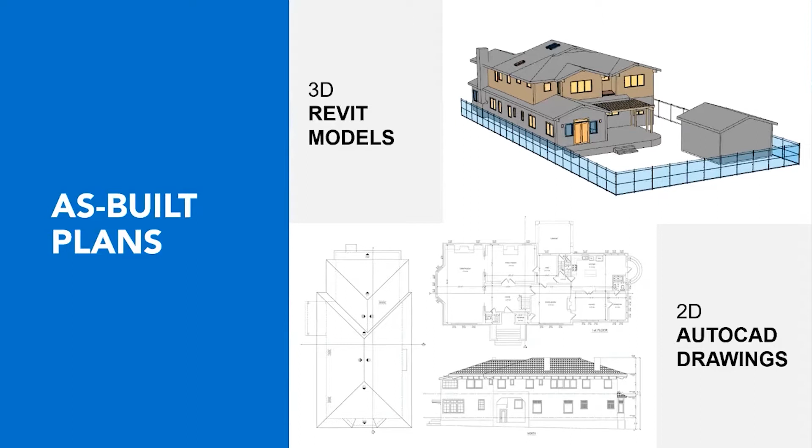All right, so now that we've defined somewhat what as-built plans are, we'll talk about when as-builts are actually needed. Pretty much whenever we're working with an existing building, we'll need as-builts before starting our new design. If the owner or client happens to already have as-built drawings, then we may need to just enter them into CAD, or reformat them if they're already in CAD, and confirm that the drawings are up to date. If errors or inconsistencies are found, at some point you may decide that a fresh set of as-builts is needed.

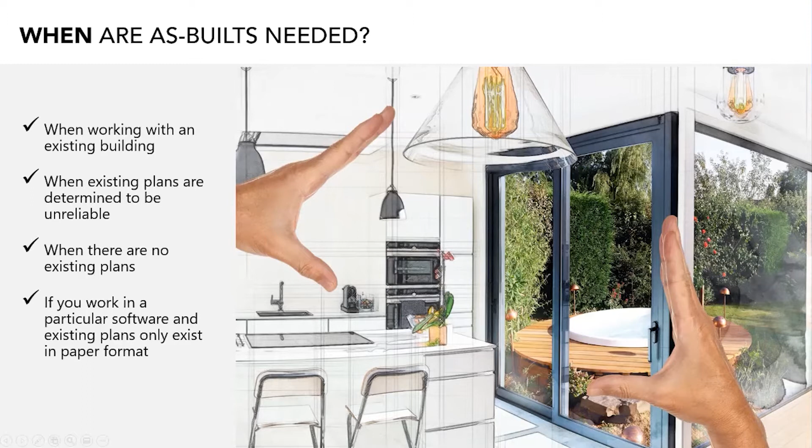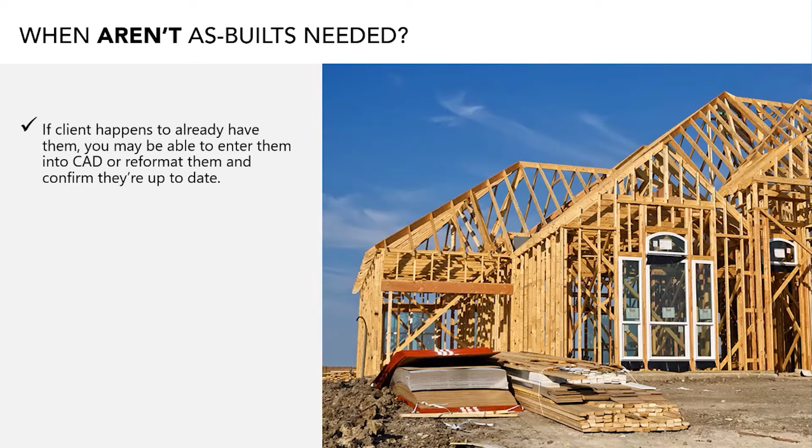Let's also talk about when as-builts are not needed. It's rare that clients already have current as-builts of their existing building, as we saw in the poll, but it does happen. So in that case, of course, you would not need more before starting your project. There are also simple cosmetic projects that don't require having accurate as-built plans. And of course, if a building is being built from scratch, under that last simple definition, you are not going to need as-builts because it's brand new construction and all you'll need are your construction documents.

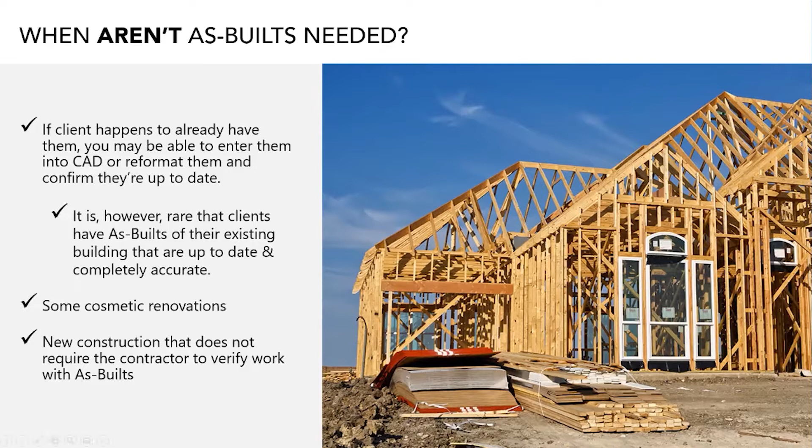Okay, so when's the best time to obtain as-built plans? In most cases, the as-built files are the very first step in the renovation, so that's probably the time to get them. Getting ahead of this step allows an architect to focus on their design and plan creation. There are also cases where you'll be submitting to historic review and they'll require as-builts before you start. And sometimes when you're working on a teardown project, some building departments will require you to submit as-builts of the buildings being demolished.

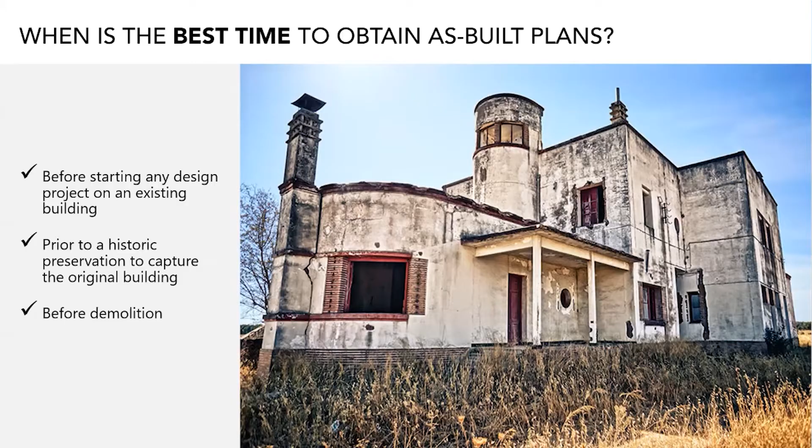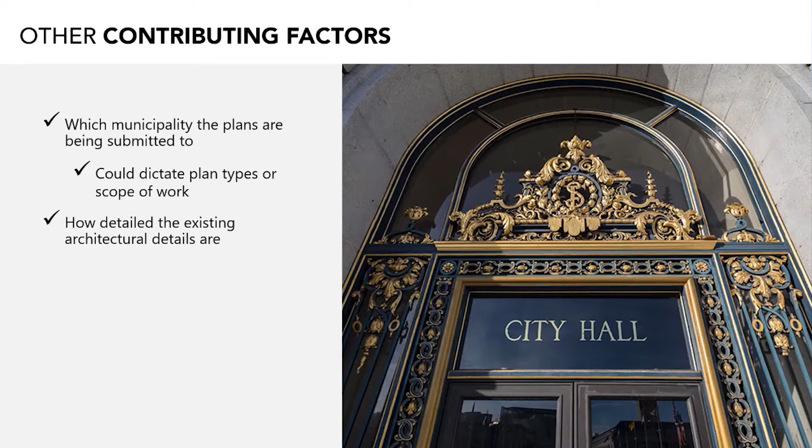So as I mentioned on the previous slide, different municipalities work differently and have different requirements. Whether they require as-builts for any reason, or the type or scope needed, may vary from city to city. If you plan to improve upon detailed architectural elements, such as ornamentation, you'll need to consider documenting it and where it fits in your timeline. And overall, the size and the scope of your project will determine when as-builts are needed, and, as we'll discuss in the next section, to what degree and scope the as-builts are required.

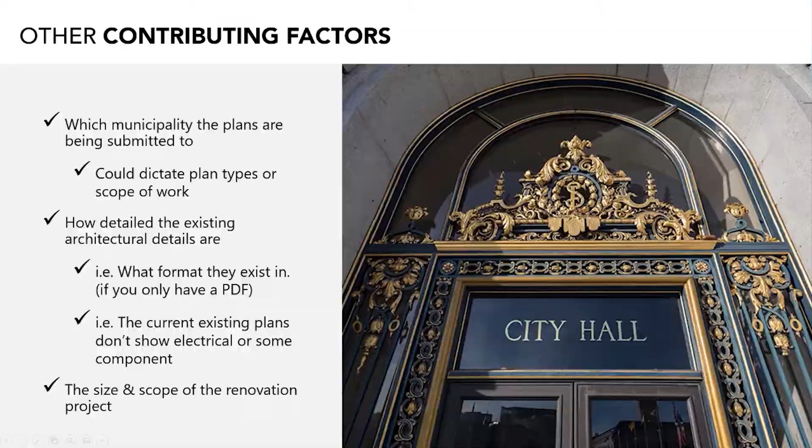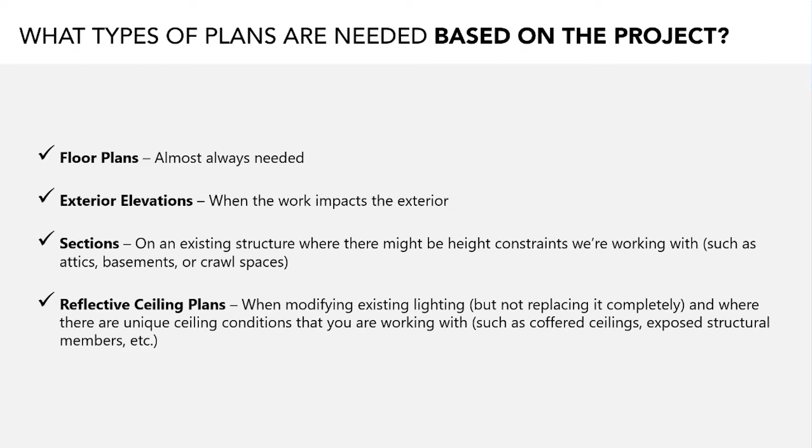So you've discovered you need as-builts. How far, or in how much detail, do you need that information to go? Above are a few examples of plan types and when they're needed in your as-built plan set. You almost always will need floor plans. If your work is impacting the exterior, then you may need exterior elevations. If you're working on an existing structure where there are height constraints or funky ceilings, soffits or anything like that, you may want to look at getting a reflected ceiling plan, and for knowing that vertical relationship, sections can be beneficial. But ultimately, it's up to you as the architect to decide the scope for your as-built plans, or consult with your engineer on what's needed.

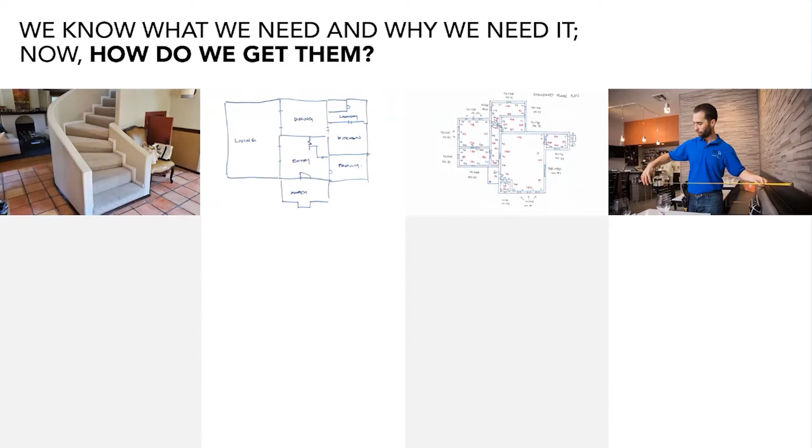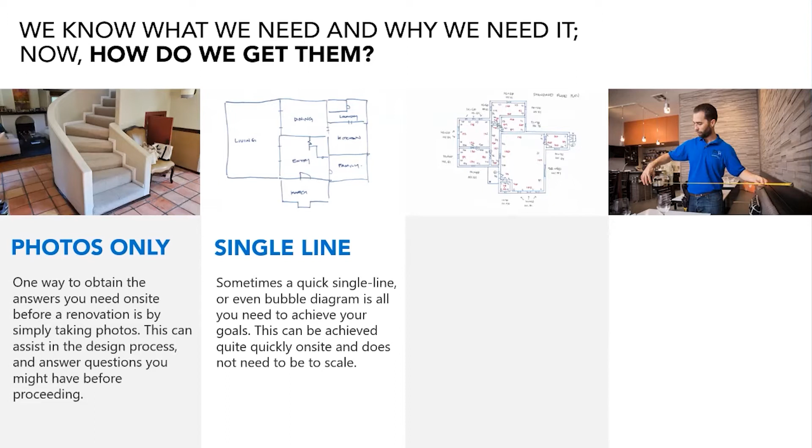So let's get into some of the different ways to gather different degrees of on-site information. We'll talk about simpler stuff first, and then we'll launch into getting a full-blown as-built set. One way to get on-site information is photos only. To obtain the answers you need on site before renovation, just take some photos. They can assist in the design process and answer questions you might have. Sometimes a quick single line or even bubble diagram is all you need to achieve your goals. This can be achieved quite quickly on site and does not need to be to scale. Sketching can be very helpful in supporting your design.

In the case of interior elevations or perspectives, this can be done roughly and not even require measurement most of the time. If the drawings need to be to scale, and if you're going to use them to create your construction documents, then you'll need to go to a higher level of accuracy and go out and measure the existing conditions.

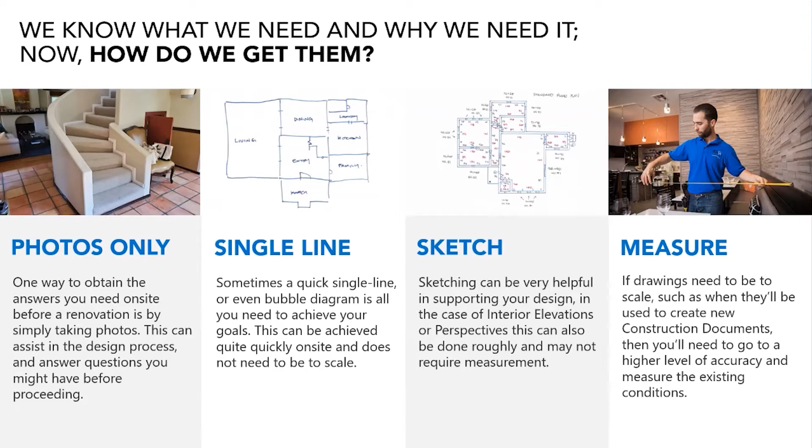Most remodel projects require a more detailed scope for as-builts. That's the simple truth there. It'll give you the head start that you need in creating your design and submittal and construction documents.

So, to sum up the first portion of this presentation, as-built plans, simply defined, are a set of plans of any structure as it exists at that moment. They're often used for renovation of some type. Getting as-built drawings in the format in which you work is important, such as a particular software, or at least a software that you can easily convert to yours.

The scope of the as-built plans and the detail of each scope item will vary with the needs of your project. Now that we've defined what they are, let's talk about how to gather that information on site. And we're going to start with some traditional surveying methods. First is something near and dear to my heart, sketching.

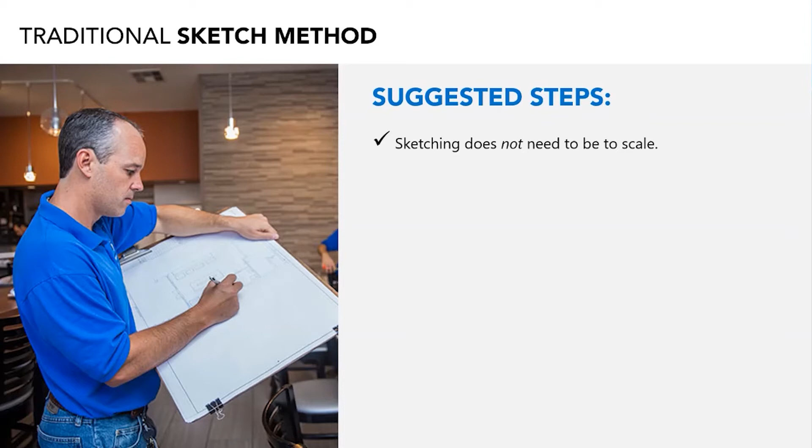So here's how you might sketch. First of all, remember that your sketch does not need to be to scale. All you need to do is make sure that there's room to write in all the measurements you need and that it's visually easy to follow when you're back in the office. And I've had plenty of sketches that aren't. You're going to want to use different colors to mark different measurements and drawing types so that your eye can catch each segment and you're not spending as much time hunting for the measurements that you need.

Get as much sketching as you can done before measuring. That way you can just focus on your measurement and execute when the time comes. The better your sketching is, the easier your measurement will be. If you've correctly sketched a structure, then the measurement will be done much more quickly than if not. And also make sure you leave plenty of room to write in those measurements, because that's the really important part.

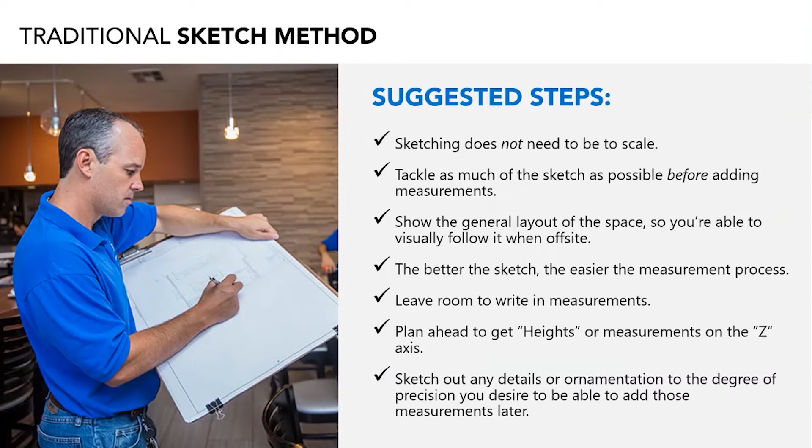Plan ahead to get those height measurements or the Z-axis measurements. Most of the time, this information can still be displayed in plan view, but occasionally you want to sketch in a section or an elevation view to visually display those heights. And also you might want to sketch out any details or ornamentation to the degree of precision you desire to be able to add those measurements later to those items.

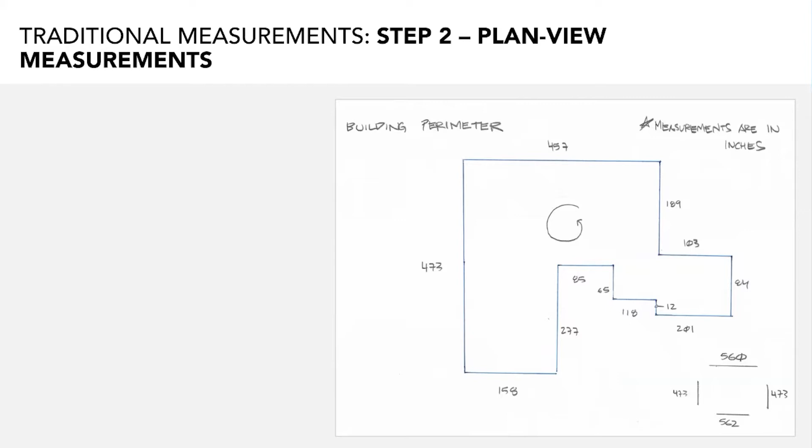All right. Now that you've done your sketching, it's time to measure, and we'll start by talking about some plan view measurements. An important step that many people skip when measuring a structure is going around the exterior faces. Often a wall thickness is measured, and then all the rest of the measurements are all on the inside, and you just assume that exterior wall thickness. I consider this step to be crucial.

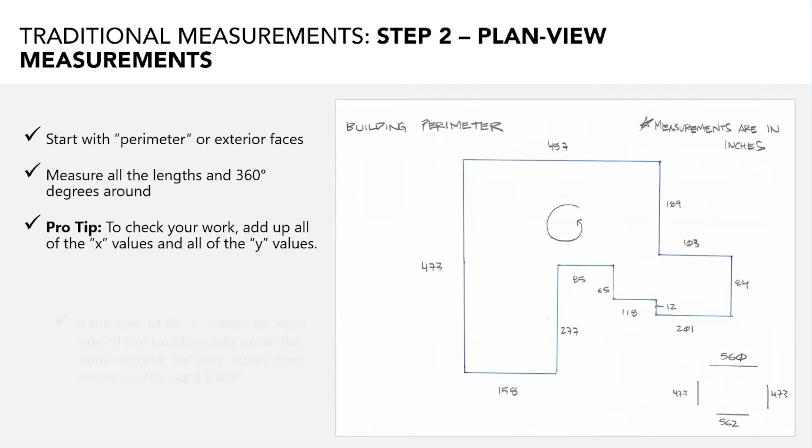So you want to start with all the exterior faces, measure 360 degrees around, and then check your work at the end. You want to add up all of the X values in your measurement and then add up all the Y values. And if you can see on this sketch in the lower right portion, I've done that math. This is all inches, by the way, that's the way I measure because it's just one single measurement to write down. I don't do feet, inches when I'm writing. But if you get that within an inch or two and you've measured a whole structure, then you know that you're on the right path.

This, of course, can get complicated if you have a building that's angled, not rectilinear 90-degree angles, if you have odd angles or curves. But then you can just get creative, go back to what you learned in geometry and do it. There are ways to get that done.

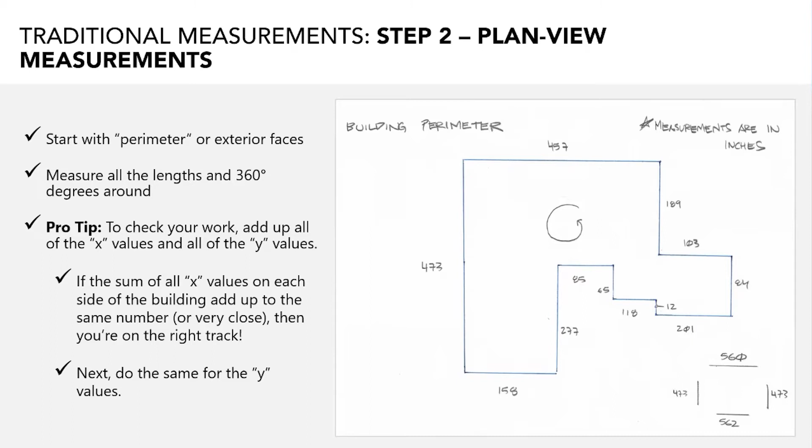All right, in this sketch, you may notice there's some overall measurements in red as well as incremental measurements in between. This is a good system of checks and balances that'll improve your accuracy and also save you in the event that you have an incorrect measurement or notation. You have the small ones, but they're backed up by the larger ones in most cases.

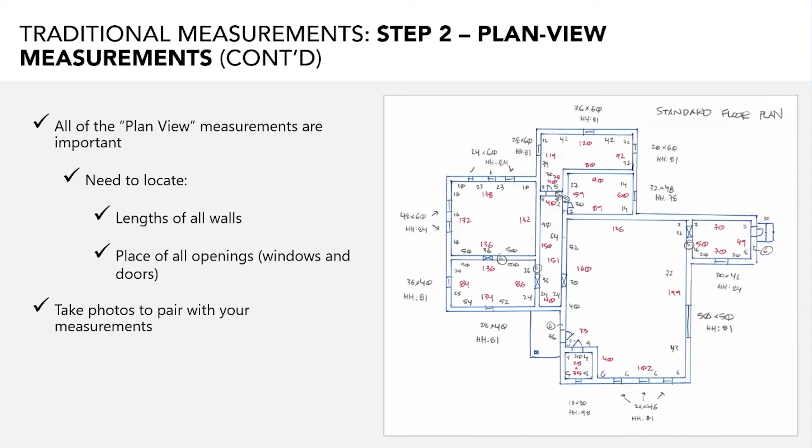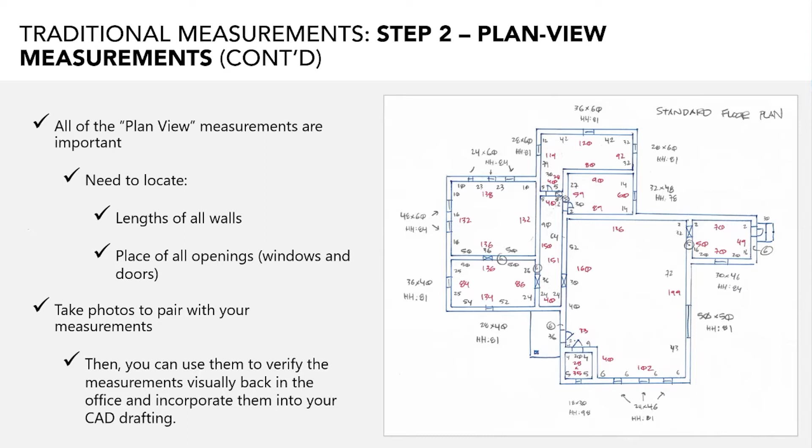And don't forget to get good photo coverage as well. That will help you verify that what you're drafting is correct. Occasionally I've seen errors that don't appear as errors on paper. Everything looks great, everything adds up, but it's really obvious when you look at an image. So yeah, even if the math all adds up, you could have done all those measurements wrong. And a photo will help you check that quality.

So another tip is to bring vellum. In this sheet, you can see that the underlay is the previous sketch with all the controlling measurements for the walls, windows, and doors. And there's a sheet of vellum over it. And this allows you to take the information from that first sketch and use it and add more symbols and measurements on top.

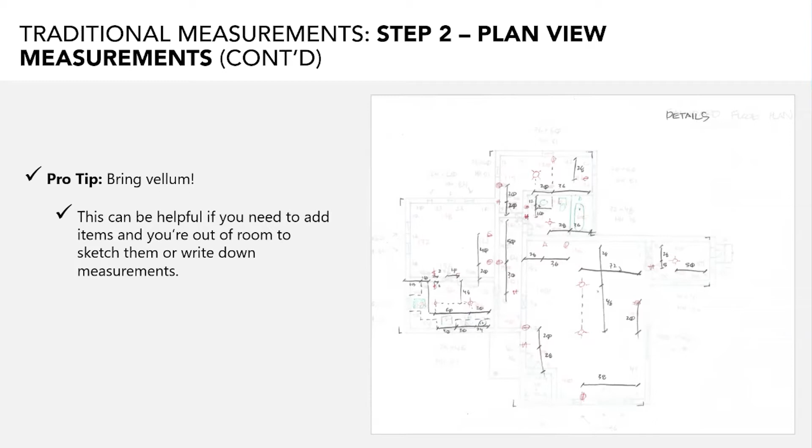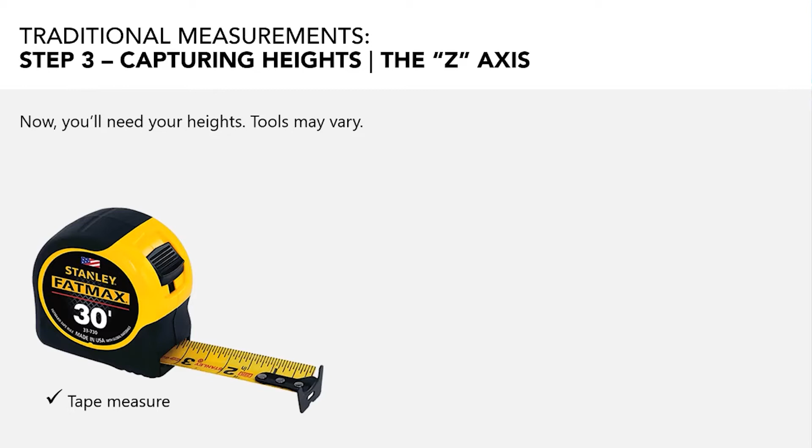All right, so now we will go on to the z-axis or height information. You can use a tape measure to measure all the risers and the stairs and add it all up. You can drop it down a balcony. You can run it up a wall. A laser distance meter or a Disto can perform all sorts of trigonometric functions instantly and get you heights in all sorts of tricky ways. And these first two tools can be used for all the plan view stuff too.

So you might be already using them on your measurement, but this third one is used exclusively to find height information. It's called a zip level. And it's an excellent tool invented, distributed, and repaired if needed by a company out of San Diego. I'm not aware of any other version of this tool. Later, if anybody knows of one, I'd love to hear about it. And I know that it uses displacement to read heights anywhere within a 50-foot radius. And it's got a cable so you can move around easily.

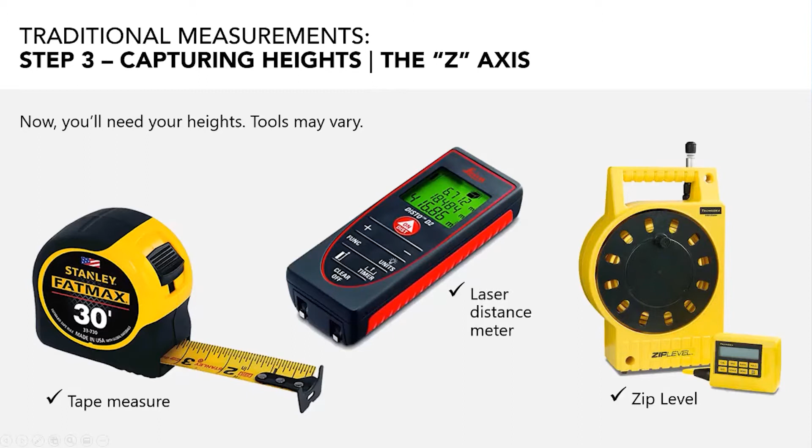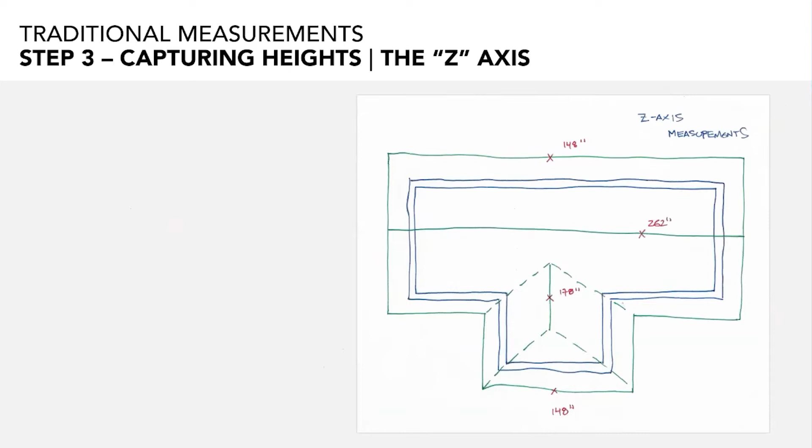All right, so however you collect those heights, you want to make sure you've got them in the places that you need them. Most of the areas will be obvious, like the tops of any steps or staircases. Plan ahead on what you'll need to see in those exterior elevations if your plans require them. Make sure that you have some height and pitch information for your roof, or you have every height on the roof, if it's safe to climb around up there, of course. Make sure not to forget the heights of openings such as doors and windows.

And if you're going to do an interior elevation, you might want to measure to the top of the countertop, the bottom of the upper cabinets, or the wall sconce that's hanging there. Or even if you're getting high detailed, the height of the electrical fixture off of the finished floor.

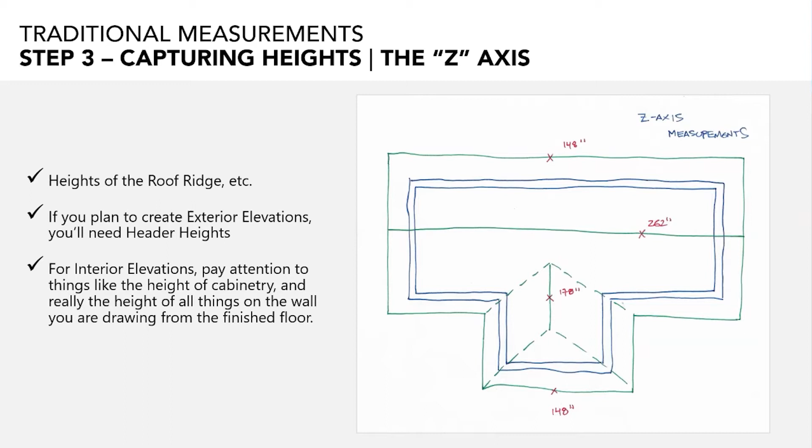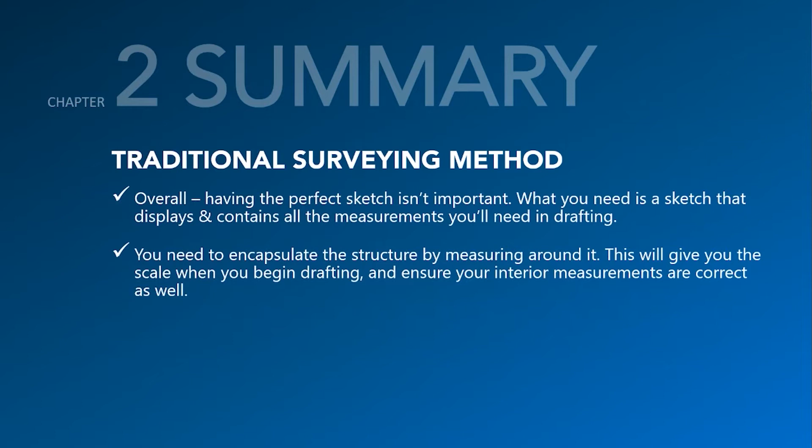So, in summary, having the perfect sketch isn't important. What you need is a sketch that displays and contains all the measurements you'll need when you start drafting. You'll need to encapsulate the structure by measuring around it. This will give you the scale when you begin drafting and ensure that your interior measurements don't start bulging out of the structure, which sometimes they tend to do if you wrote something down wrong or measured it incorrectly. That will keep you bounded in.

And after taking the measurements of the major items like walls, windows, and doors, then you can go on to the next level of detail as needed, whether it be just the plumbing fixtures and cabinetry or electrical and RCP. You can go from there as far as you want to.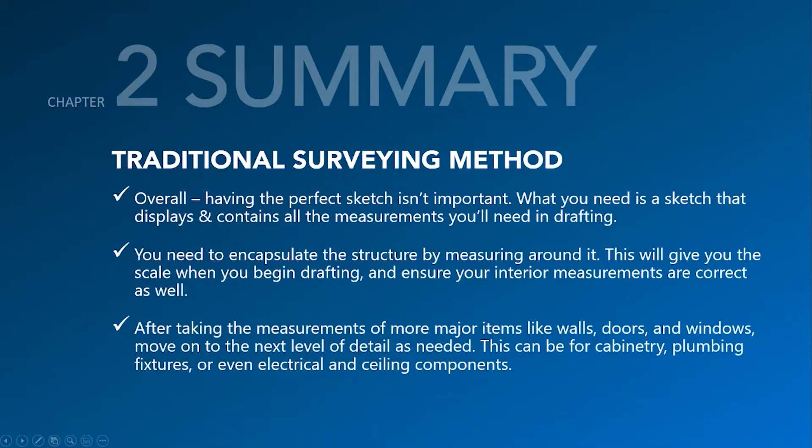And now for our next poll. Let's see. I'm sorry, I'm going to go to the next poll. I see, poll 2. There we go. How comfortable are you with sketching and measuring your as-builts? The first answer is very uncomfortable, it makes me sweat just to think about it. I've done it, but I don't like it. I am comfortable doing this, and I always sketch and measure my as-builts. I love it.

I'm getting some varied results here. Interesting polling. Please, everybody participating, don't be shy. Let me know what you think about this as-built process. Be honest. I'll give you a couple minutes if you need to think about it. We've got 75% of you have voted. And I'll give it just a couple more seconds while I take a drink of water. All right.

So it looks like we've got some comfortable measurers out there, which is great. So this is good to see, and hopefully maybe I was able to impart some tips on those traditional methods there. So yeah, let's move on, and thank you so much for participating in that second poll. All right.

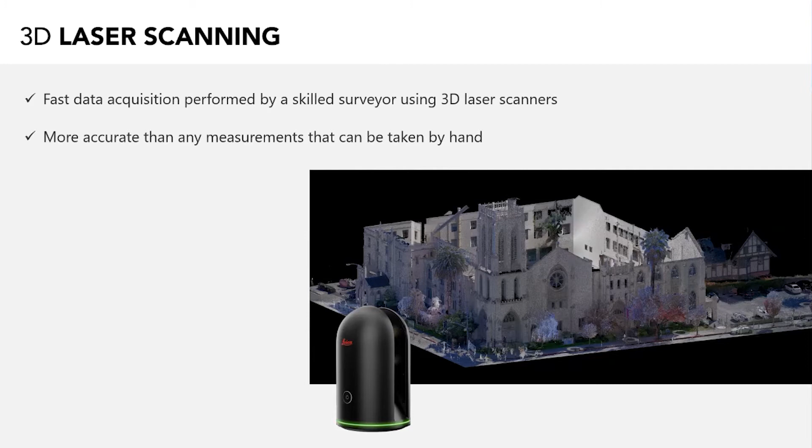The technology can be purchased, rented, or contracted. It's a thorough solution. It allows you to gather more data rather than less data to complete your project. And it provides a digital twin to pull additional data down the line if your project needs to be revisited or additions need to be made to the scope of work.

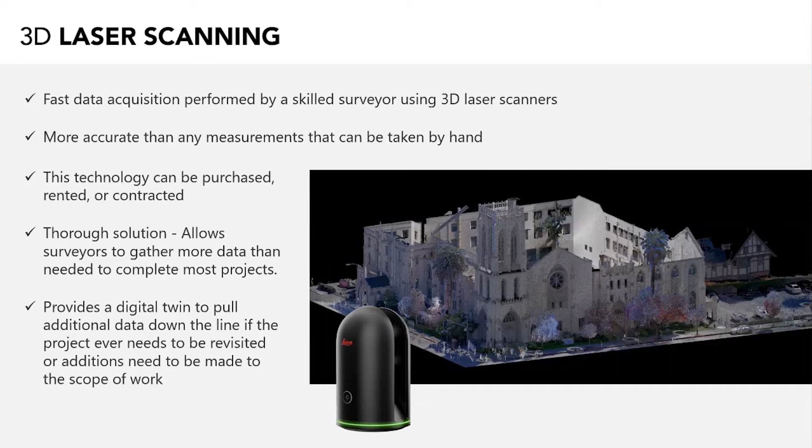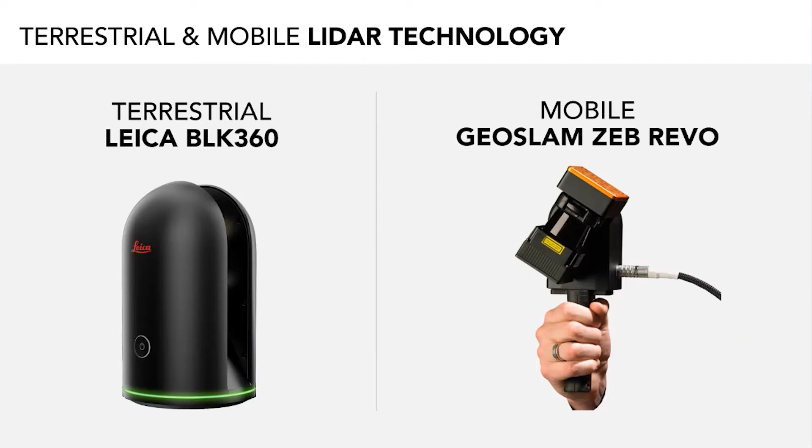So now here's some examples of each type. We have a terrestrial standing scanner or a mobile walking scanner. Either way you choose to go, you'll be using LiDAR to create a point cloud. So LiDAR is a method of measuring distances by illuminating the target with a laser light and measuring the reflection with a sensor. Each one of these illuminations can be considered a measurement. Each single measurement is logged, and throughout the course of the scan, millions of measurements are taken in all directions.

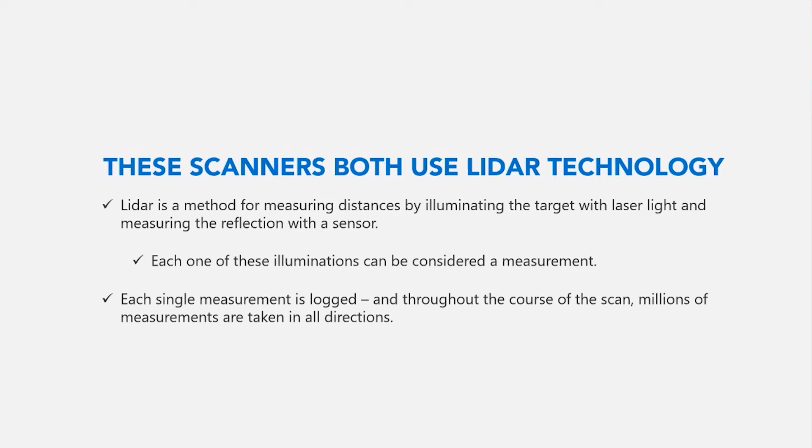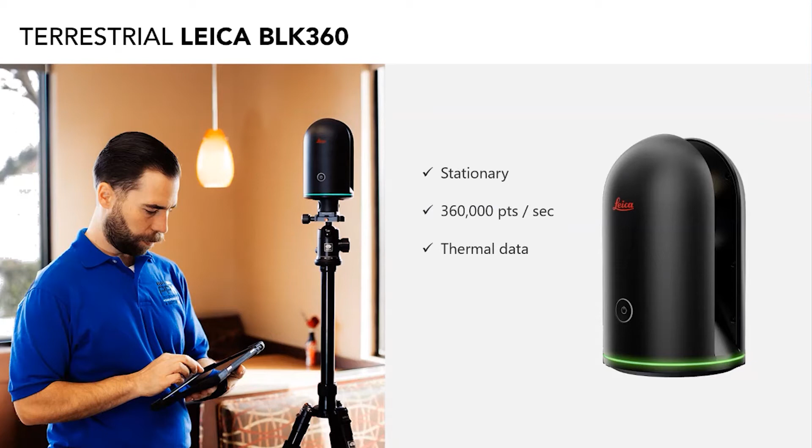So first, let's talk about a terrestrial scanner I'm familiar with. This is the Leica BLK360. Overall, you'll find that terrestrial scanners like this one will give you a much more rich, dense point cloud than a mobile scanner would. Some terrestrial scanners offer extremely high levels of precision to their clouds. So in the next scan, we'll see a short video of a scan of a single family residence taken with this scanner, okay?

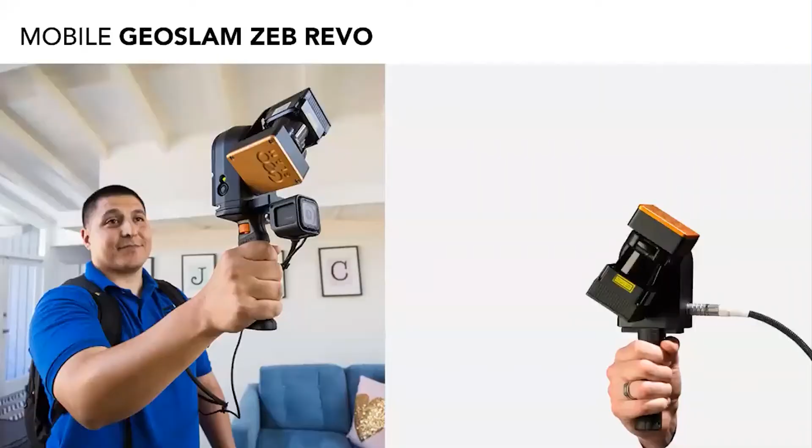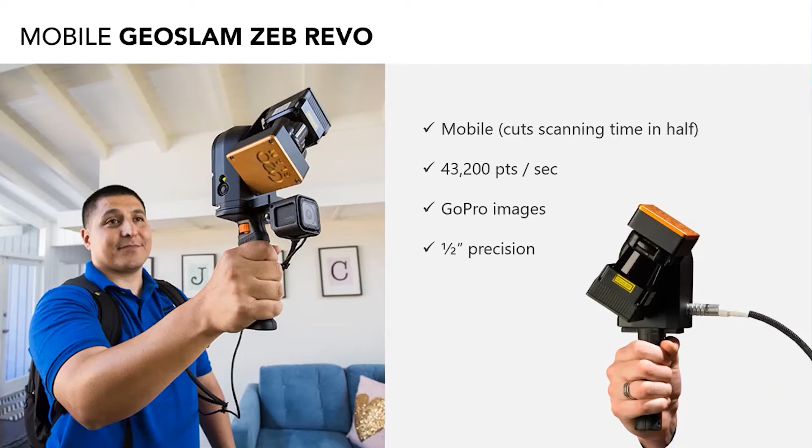And now let's touch on mobile scanning, and we'll look at a scanner that I'm actually most familiar with. This is the GeoSLAM ZEB Revo. All right. The trade-off for a less dense point cloud or a hyper level of precision or no thermal readings is that with a mobile scanner you can greatly reduce your time on site scanning. You can increase your mobility since you're moving while you're scanning, and the scanner doesn't need to be mounted to anything. And you can even mount other equipment onto the scanner, such as a GoPro to video your path, or you can take the scanner itself and mount it onto a drone potentially.

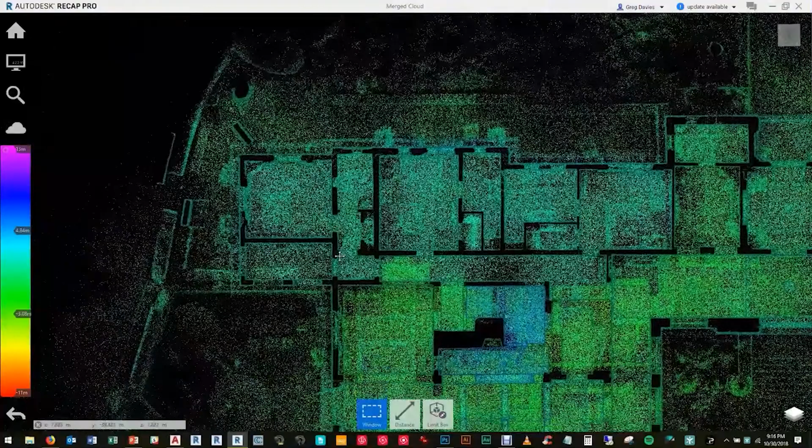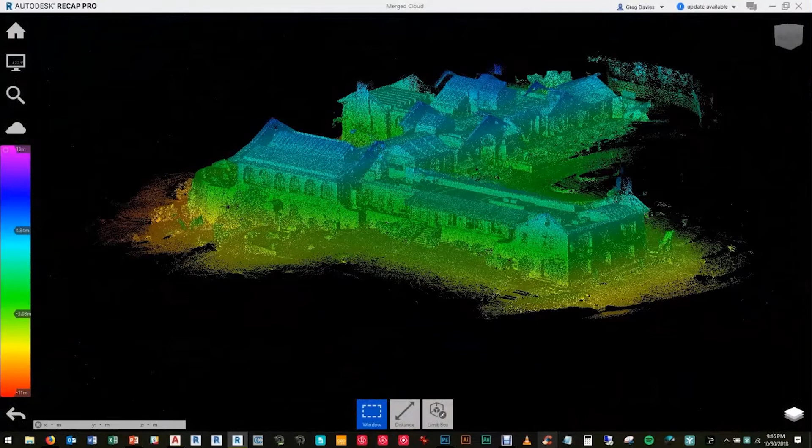So now we're going to watch the video of some output from that scanner. You may notice that the coloration of the materials isn't noted with this one, but it does have a height ramp visibility. So different heights are shown as different colors on the spectrum. In this one, you can see that there's blue at the highest points, then it fades into a green and yellow as it goes down. That's just to help you visualize it even further. And that's a single family residence that we scanned right there. One family lives in that monster house.

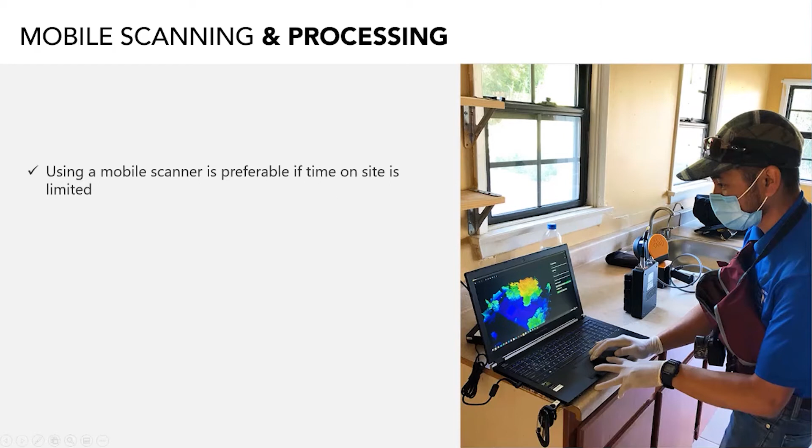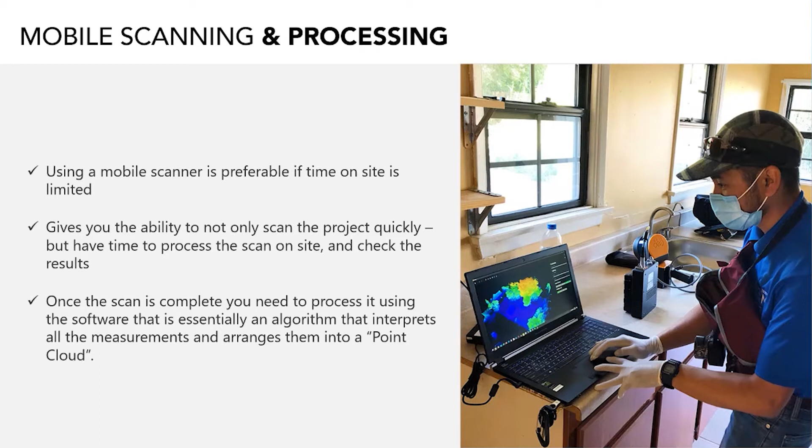So using a mobile scanner is preferable if your time on site is limited in any way. Mobile scanning can give you the ability to not only scan the project quickly, but have time to process the scan while you're still there on site. And we'll talk about why that's important in a minute. Once the scan is complete, you'll need to process it using the software that's essentially an algorithm that interprets all those millions of measurements that you took and makes them into a point cloud. So let's talk about this infamous point cloud now.

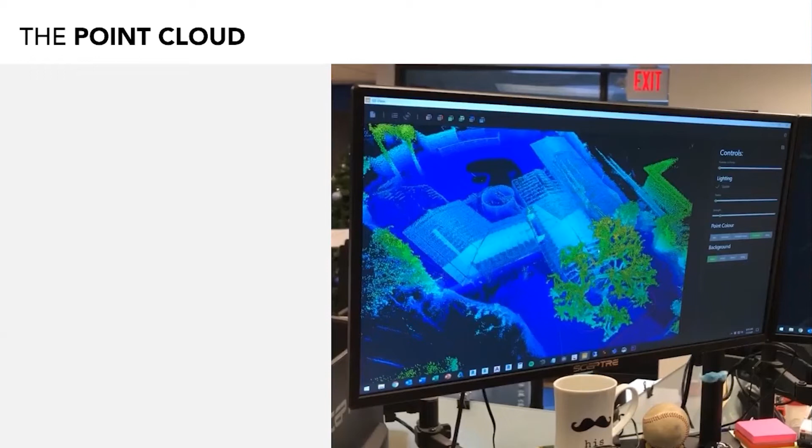Reviewing all your data well before attempting to create a set of as-builts from it is a must. If there's any kind of errors within your cloud, when they do happen, using that bad data can stop you in your tracks when you're drafting or modeling, or worse yet, you could finish and then just have a bad data set. So once your scan is processed, you'll need to review the output. You need to make sure that you covered all the areas. It's common that you just didn't enter a room or something like that. And if you didn't do it, likely it's not going to be in your point cloud. You want to look for any flaws or errors in the point cloud if possible. And then you also want to check for drifting in your point cloud. We'll talk about that even more on the next slide.

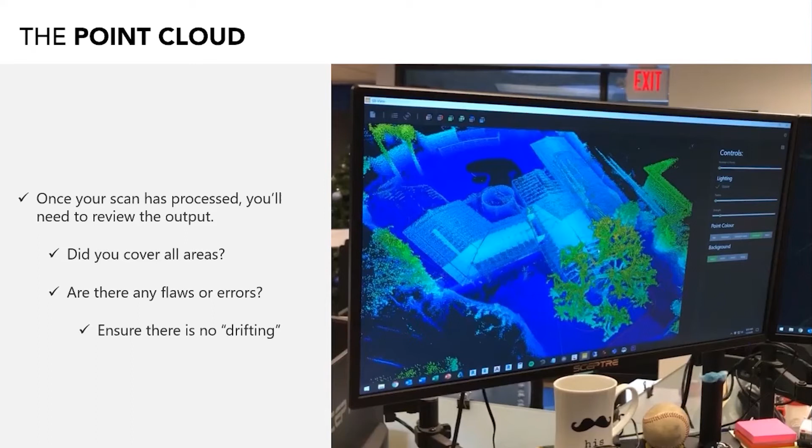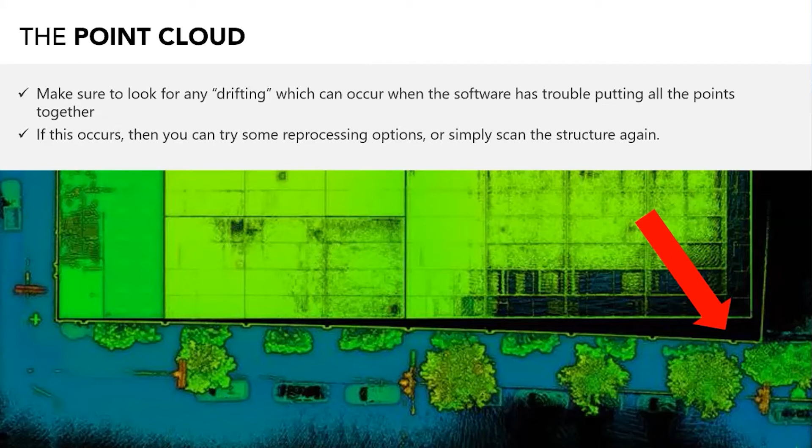Make sure that you look for the drifting, which can occur when the software just has trouble putting all those points together. This is a good example of that here. If it occurs, you can try some reprocessing options or simply scan the structure again. Drifting is common with mobile scanners, and it occurs for several different reasons. Determining which reason is helpful before attempting to reprocess or rescan your project.

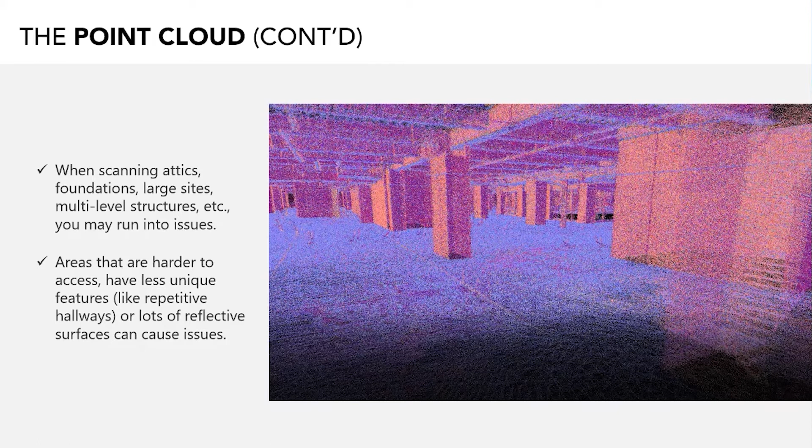When scanning attics or foundations, large sites, multi-level structures, you may run into issues as well. Areas that are harder to access, tight squeezes, or areas that have less unique features like repetitive hallways and reflective surfaces can cause issues too. Remember that the algorithm is trying to put this together, and processing requires all areas have data connecting one area to the other so they can be properly glued together. Mirrors, moving objects, or repetitive, non-unique areas can trick the process and therefore give you bad output.

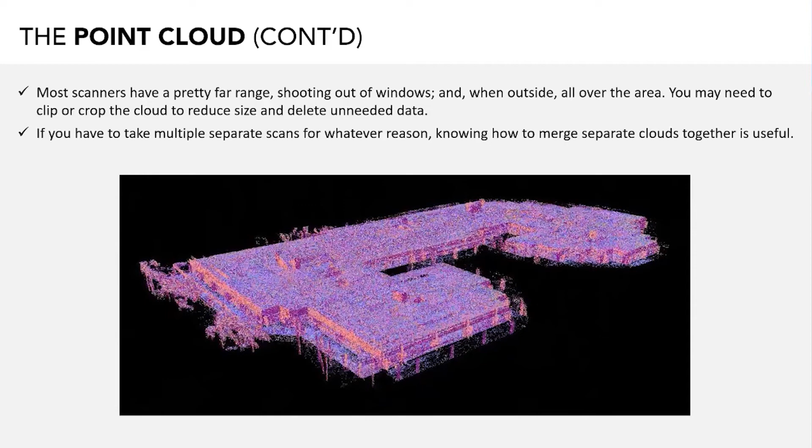Most scanners have a pretty far range. They shoot out of windows, and when you're outside, they shoot all over the area. So you may need to clip or crop the cloud to reduce the size and delete the unneeded data. If you have to take multiple scans for whatever reason, merging is possible, and knowing how to do it can help you greatly. So much like the traditional method of sketching and measuring, scanning takes lots of practice to do properly and effectively. Let's talk about using the point cloud.

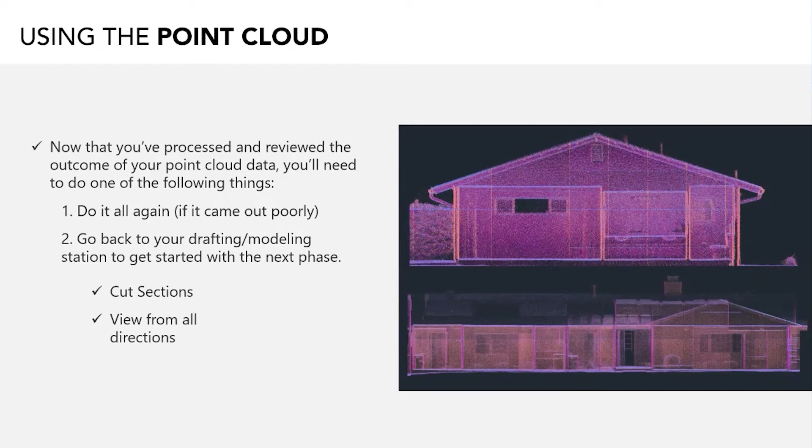So now that you've processed your point cloud and reviewed the outcome of your data, you'll need to do one of the following things. Do it all again if it came out poorly, or go back to your drafting and modeling station and get started with the next phase, which is your actual as-built plan creation. In order to produce items such as a floor plan, you'll need to be able to slice the point cloud into the desired section and work from that. Most software allows you to do this pretty easily. In addition to cutting sections, you'll need to be able to move and rotate the clouds to give you the correct working angle that you desire.

And so, in summary, scanning your project can reduce errors and time spent on site. The type of scanner you use will be dictated by your needs and the level of detail required. And your scanner will create a point cloud made up of millions of points. Knowing how to manipulate it is crucial. This way, it will have the utility you need when it's brought into your preferred software.

As an added note, I just want to mention that from my perspective, almost overnight as-built production methods have shifted from those traditional methods that have been used for decades to these newer ones utilizing the latest in laser technology. As with every new introduction of production methods, there's a learning curve. But once it's mastered, the entire process gets much smoother. And when it's incorporated with BIM technologies, the entire construction process can get a boost in speed, efficiency, and a lesser environmental impact too.

So now that we've gathered the on-site information from whichever method we used, it's time to create the actual plan set. It's important to keep these organized and concise, but at the same time leave room for notes and building code information so they can be used for your design layouts, your demo plans, construction documents. So I know we've recently been talking about scanning. Now we're going to shift gears back to the traditional method and how to translate those sketches into great as-built plans.

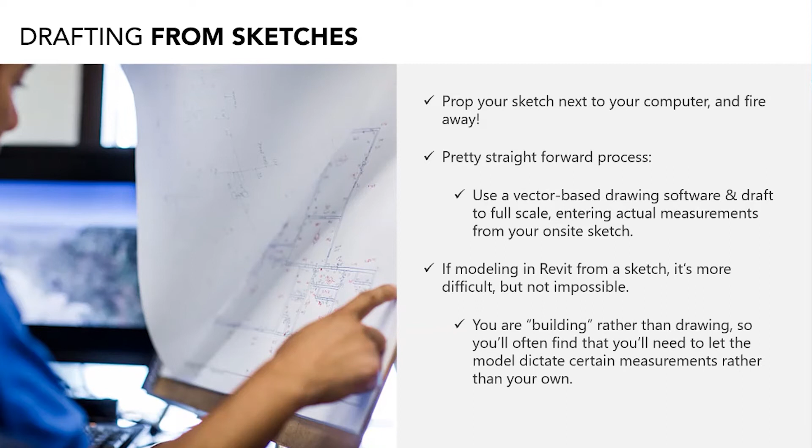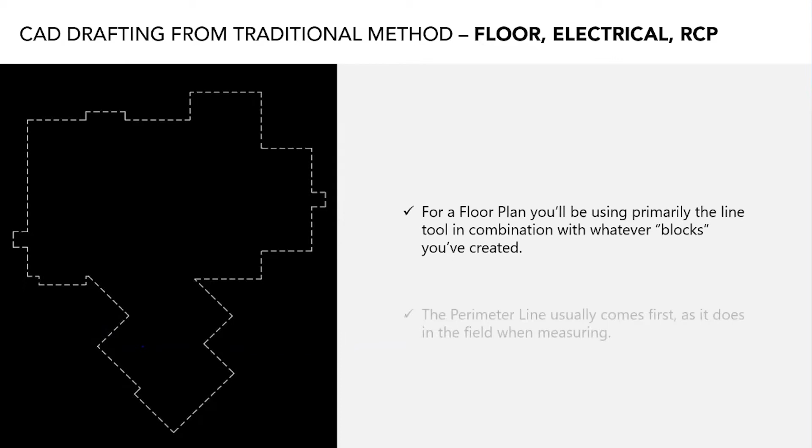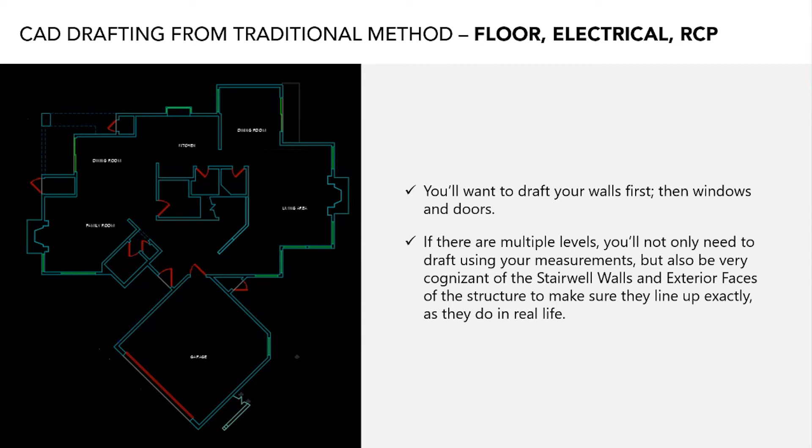So now we'll talk about those plan view aspects of your as-built set. For a floor plan, you'll primarily be using the line tool in combination with whatever blocks you've created. The perimeter line usually comes first, as it does in the field when you're measuring. You want to draft in all the walls first, and then the windows and the doors. And again, that's kind of your controlling stuff. And an important thing to recognize, if there's multiple levels to your structure, you not only need to draft using your measurements, but also be cognizant of those stairwell walls and the exterior faces, and make sure that they line up exactly as they do in real life.

Once those controlling items are done, you can draft in, with perhaps a little less degree of precision, the cabinetry, plumbing fixtures, appliances. And if you're adding electrical and reflected ceiling plans, it's pretty much the same. Just follow what you've sketched and measured, add the items one by one.

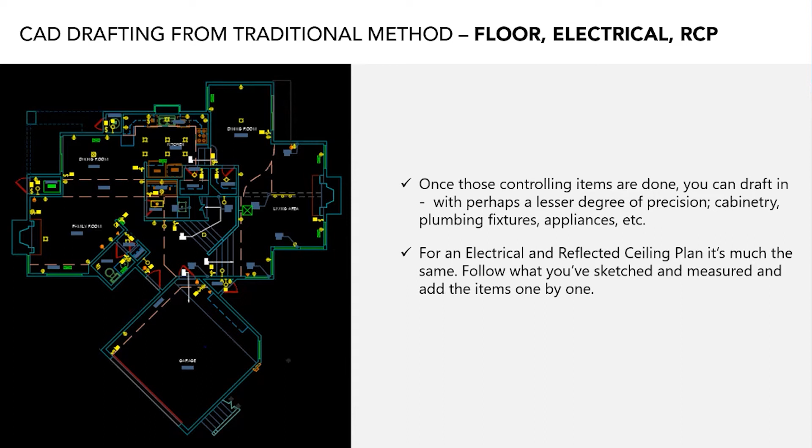So now we'll talk about some other, this is still a plan view drawing, but getting into some of the height stuff. You'll need to at least have sketched the behavior of a roof correctly to draft the roof plan, or at least use a nice clear satellite photo. This means all the hips and the valleys and ridges, the directions of any of the slopes, and this and the measured length of the overhang should get you to a place where you can draft your roof in plan view.

On that same roof sketch, as we discussed earlier, you're going to make sure that you have all the height information. This can be achieved by using the zip level, that tool that I mentioned before, actually getting on the roof and taking all the needed height readings. There's other methods, of course, using an angle finder, a level, and the functions of a disto.

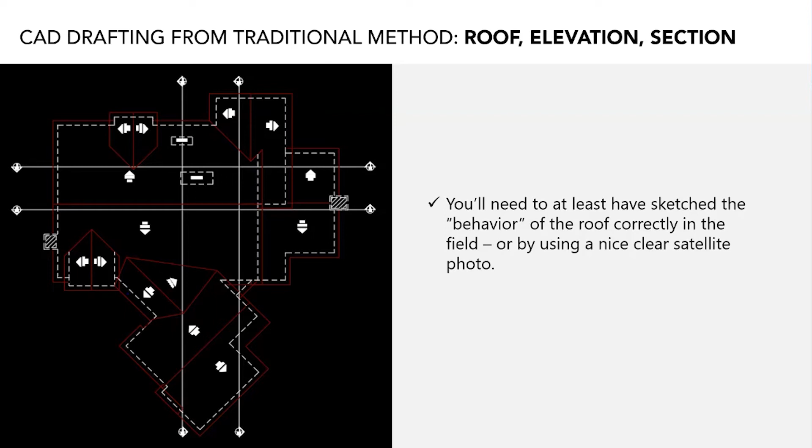Drafting a roof in elevation view, I can say, is one of the most difficult challenges, as it needs to correspond directly with all the other elevation views. So that's the toughest part.

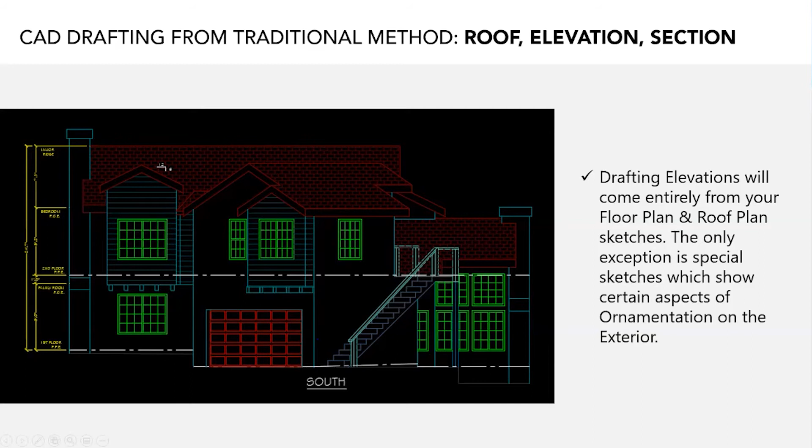Once the cut location and the direction of a section are determined, you'll use the floor and ceiling information you've sketched and measured on site to complete a section view. To draft the roof properly in section view, it's highly advised that you have your elevation drawings drafted first. That way you can use them to draft your section.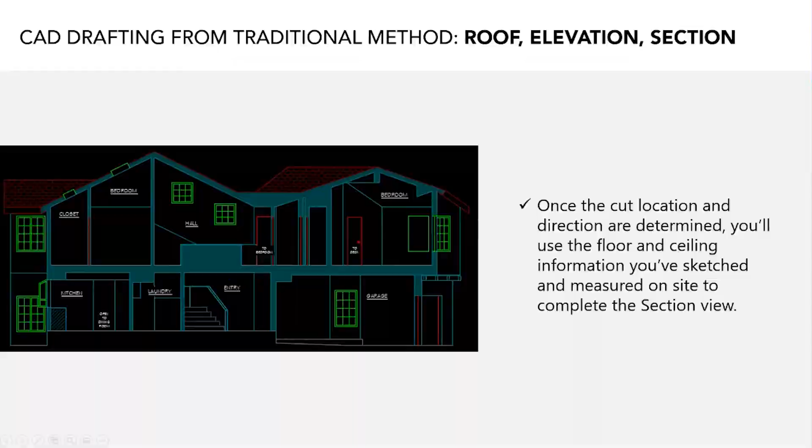Okay, so now we can shift our thinking back to the scanner method and doing this work using the point cloud that we've created. If you use laser technology to measure, you'll be drafting from a point cloud. This can be imported directly into your CAD or Revit software. Autodesk requires that you use another software called ReCap to prepare the point cloud for the import and ensure it works with their software. Of course they do.

Drafting from a point cloud in CAD is pretty straightforward, but it takes getting used to. There's lots of options in CAD to adjust the cloud in several ways. You'll need to adjust the view cube or rotate the UCS orientation properly to work with the cloud in different positions.

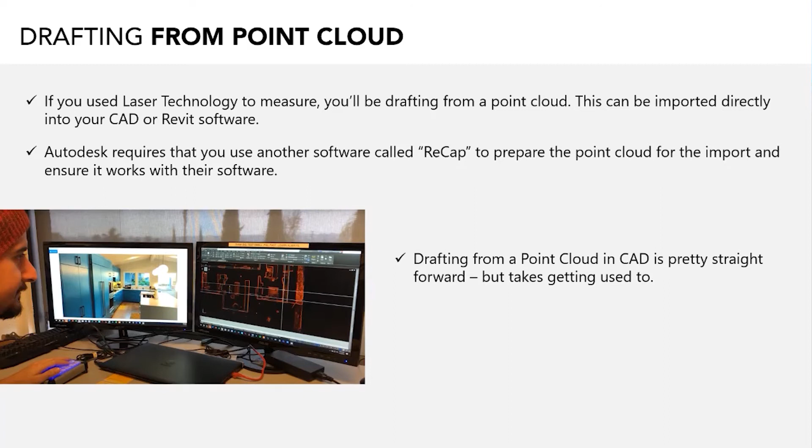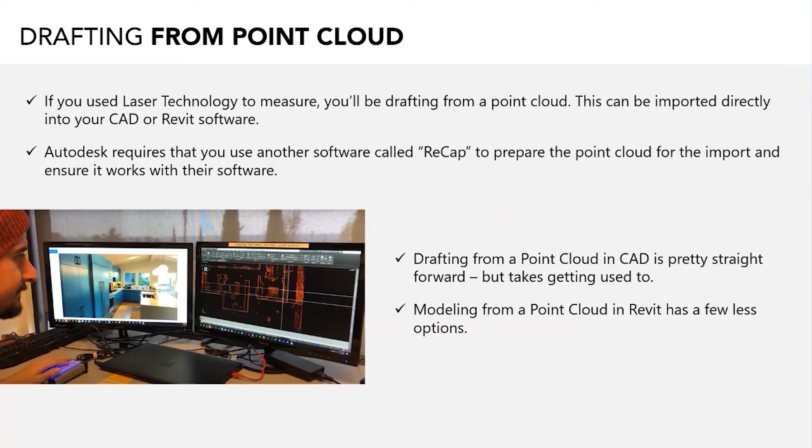Modeling from a point cloud in Revit has a few less options, but since the entire program is focused on modeling from a particular view range, it allows you to manipulate your model and the cloud simultaneously. Remember, the point cloud's a three-dimensional object, so when you bring it into 3D software, the two can work with one another fairly easily.

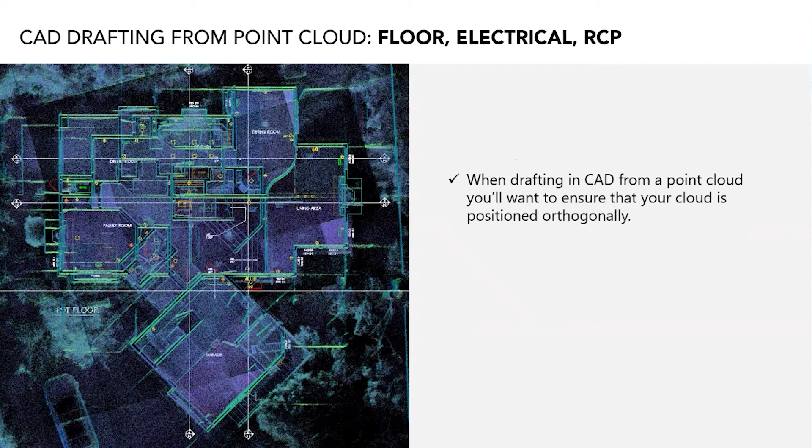So first, we can talk about drafting plan view items from a cloud. When drafting in CAD from a point cloud, you want to ensure that the cloud is positioned orthogonally so that you can use the ortho function in CAD to draw the lines. As you can see with this house, you need to switch to polar a couple times as well. Positioning your cloud on the Z-axis is also desirable in CAD for several reasons.

You should be able to derive all the walls, doors, door swings right from the point cloud. Window information can be found as well if you're skilled at reviewing the clouds. Most scanners won't pick up the smaller items, especially if they're flush with the walls or the ceilings. So trying to locate them in the cloud can be very, very time consuming. I'm talking hours. So oftentimes it's better just to revert to the traditional method while you're in the field and sketch and measure these items.

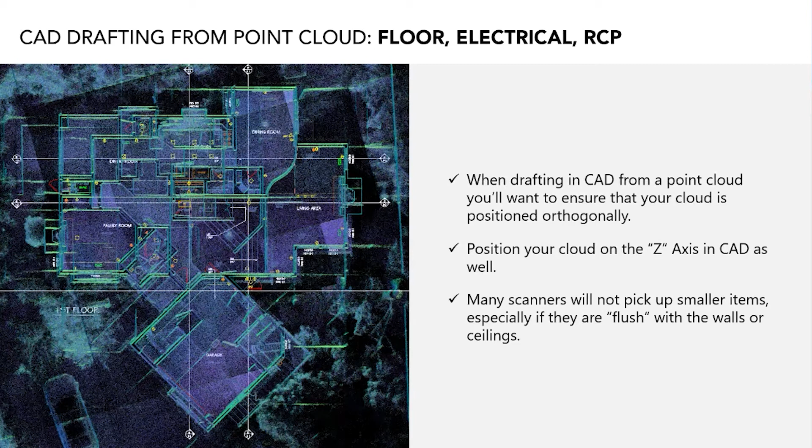So now let's get into drafting other views such as elevations from the point cloud. This is where you have a huge advantage in having a complete point cloud for drafting. Provided you're able to access the roof in scanning, you'll have a complete picture of not only the roof behavior, but also every height you need to properly draft your roof. Your exterior elevations, your sections, all that stuff.

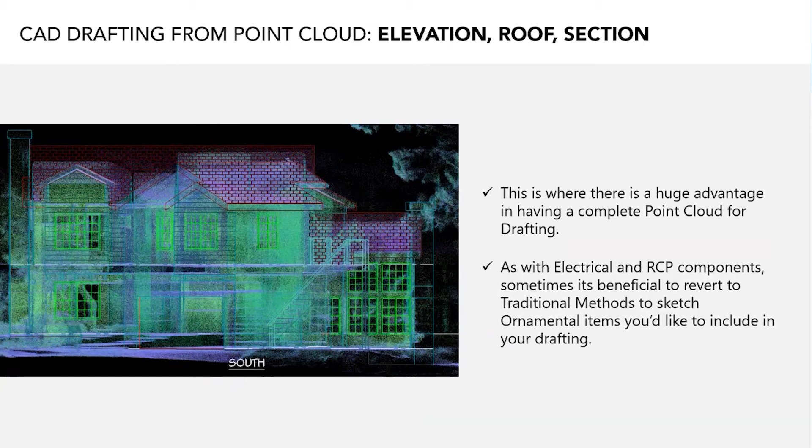As with electrical and RCP, sometimes it's beneficial to revert back to traditional methods for ornamental items. If you have that window with kind of like a funky mullion thing going on, you might want to just sketch that, and that way you can draft it into your software quickly rather than try to hunt for it all in the cloud.

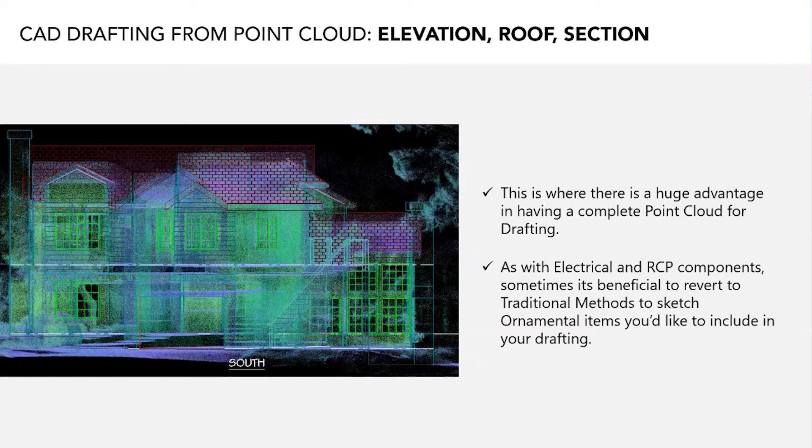Okay, and now we will touch on the Revit as-built model or the 3D as-built model. And to do so, you've got to talk about level of development. The level of development system was created for the AEC community to put standards on BIM drawings. It rates the precision, detail, and overall refinement you can take your model to, with level 100 being the lowest and level 500 being the highest. 100 just means you mass basic geometric shapes roughly, and 500 is so detailed that you're virtually just building a virtual version of the structure in Revit or whatever 3D modeling software.

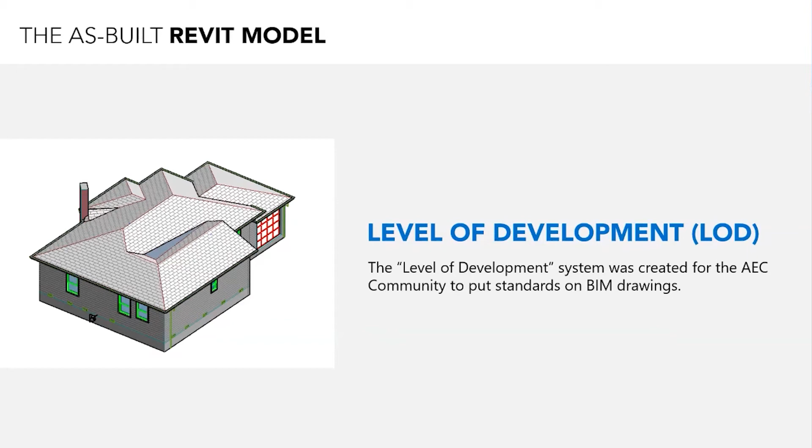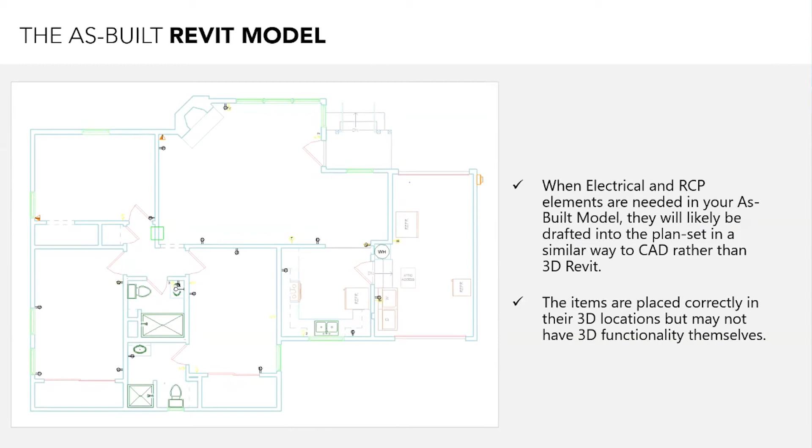When modeling as-built plans, LOD 200 to 300 is the applicable range since you're assessing a structure that's been built and you're assessing it from the outside. All interstitial spaces are inaccessible and their construction cannot and should not be assumed. When electrical and RCP elements are needed in your as-built model, they'll likely be drafted into the plan set in a way similar to CAD rather than 3D Revit. The items are placed correctly in their 3D locations, but may not have 3D functionality themselves.

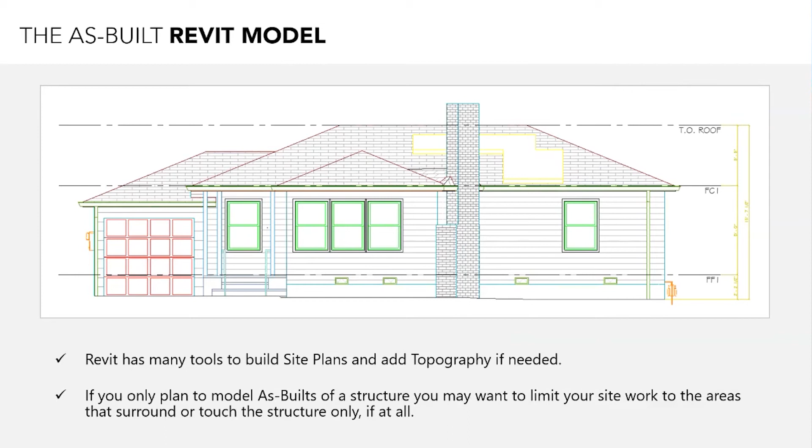Revit has many tools to build site plans and topography. If you only need to model the structure, you may want to limit your site work to the areas that surround or touch the structure only, if at all. Wait, I just want to touch on one other thing. In the case of exterior elevations like this one, you want to make sure that the finish grade is accurate along the face of the house. This can be achieved without going into all those topography tools. You can just use some simple drawing tools to do this.

I just want to say there's some advantages to having a BIM as-built, which you may not know. Sometimes a three-dimensional model is only considered for presentation stuff or design stuff, but it also can be useful with an as-built. So here we see the as-built BIM model already has the phasing in the existing phase. So you can dig right in and start a project and use their powerful phasing tools to show demo and proposed. There's no time wasted moving from the design phase to the construction documents phase of a project.

Having an as-built BIM model can make it easier for you to understand a project that you haven't visited, because you can cut all those sections and view the existing spaces and roof massing in 3 dimensions. And some say Revit offers a more intuitive design experience overall and allows users to present 3D images at the planning stages to the owner or the planning departments.

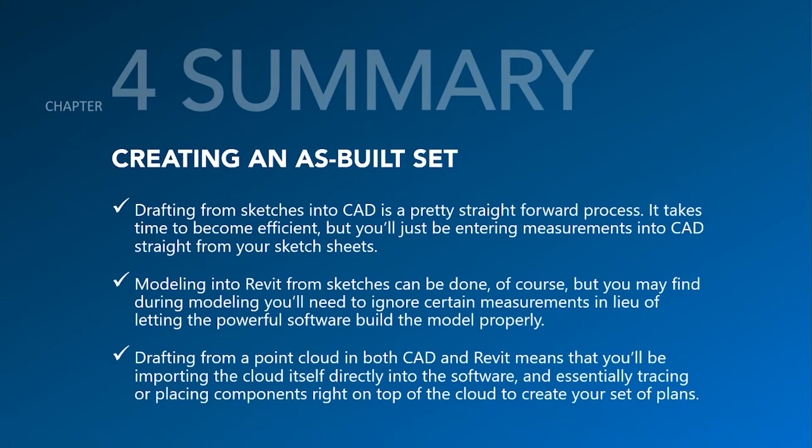And so to sum up this 4th portion and the entire presentation itself, drafting from sketches into CAD is a pretty straightforward process. It takes time to become efficient, but you'll just be entering measurements into CAD straight from your sketch sheets. Modeling into Revit from sketches can be done, of course, but you may find during modeling that you'll need to ignore certain measurements in lieu of letting the powerful software just build the model properly. Drafting from a point cloud in both CAD and Revit means that you'll be importing the cloud itself into the software and essentially tracing or placing components right on top of the cloud to create your plan sets.